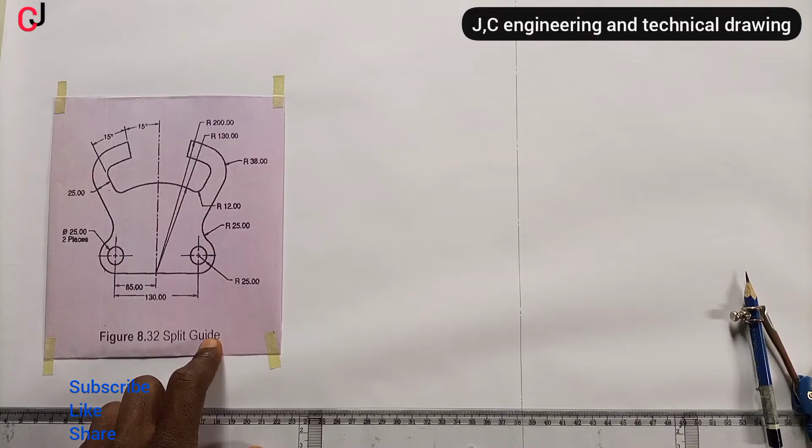Today we'll be drawing a split guide using the principle of tangency.

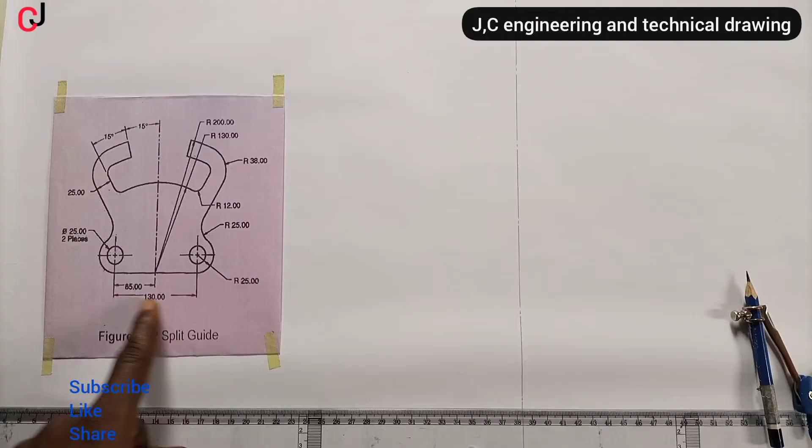So we've succeeded in drawing a vertical center line, which is this. Now from our diagram, we are told to locate 2 points such that the total distance from those points will be 130 millimeter apart.

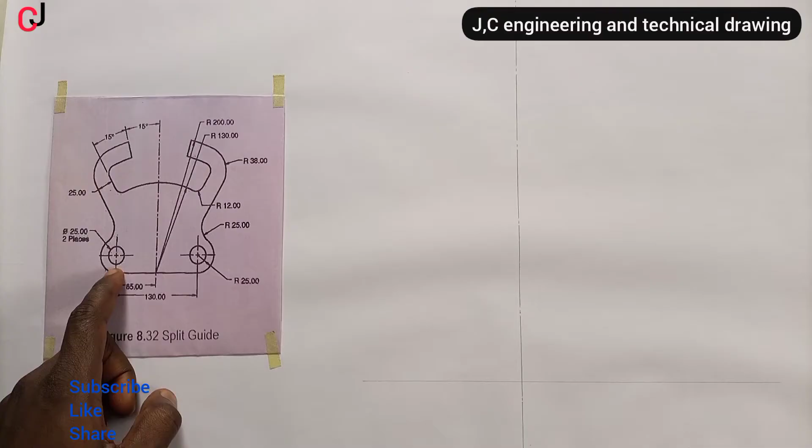All we need to do is draw a straight horizontal line, and from our diagram you can see from this line to this given point is given to us as 65 millimeter. So measure 65 millimeter radius, we indicate it with a point.

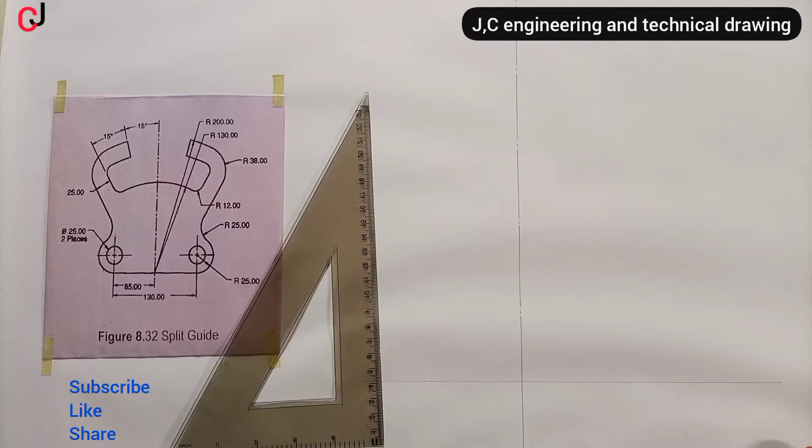Then from our point we draw our vertical line up. You can see also we measure 65 millimeter towards our right also, and then we indicate it the point.

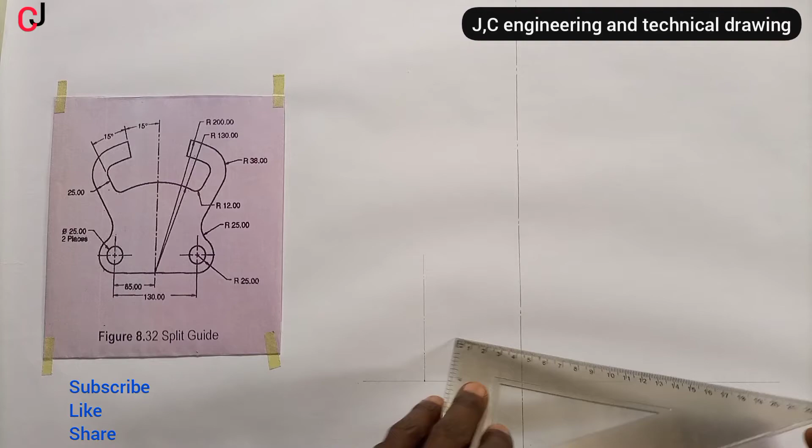And then we'll project the points upward with a center line, which we succeeded in doing.

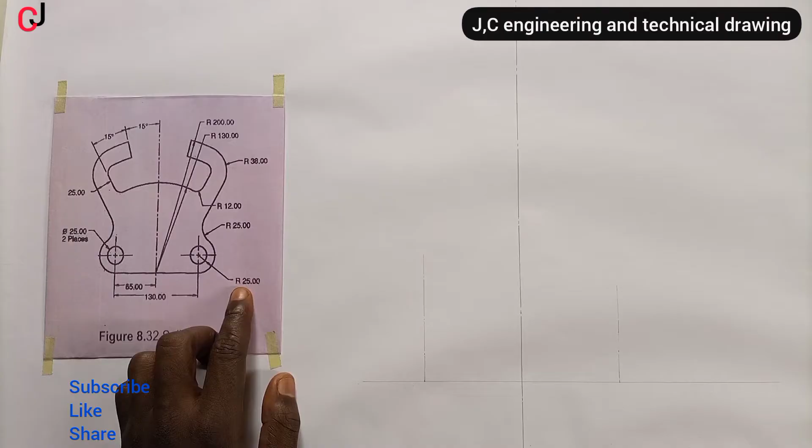From our diagram you can see a radius here of 25 millimeter radius. So what we need to do, pick 25 millimeter from our rule using our compass. Place it at the beginning of this tip, then we'll scribe an arc.

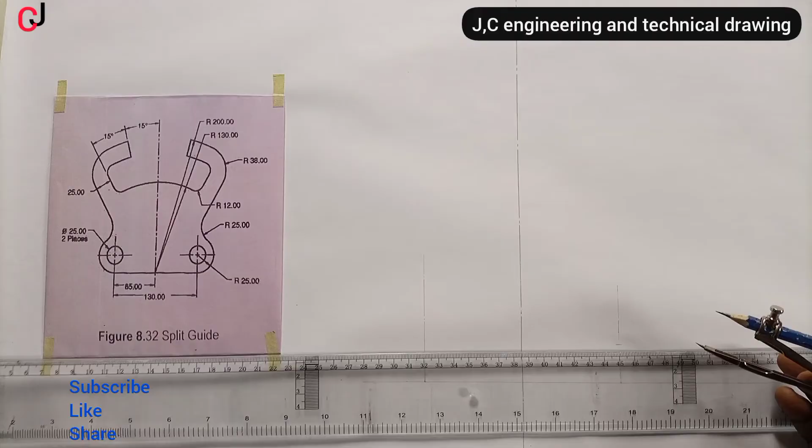Then from our point, our arc which we've just constructed, we'll project the arc with a center line. Also we'll do same towards our left this way, and then we'll call this point here point A, and we'll call this point A1.

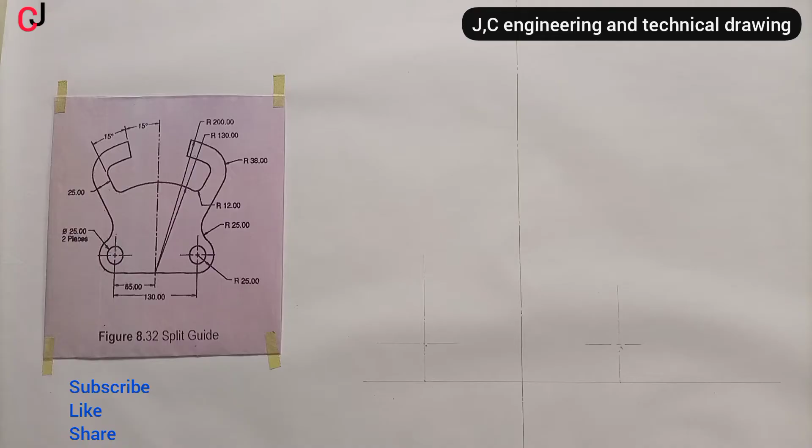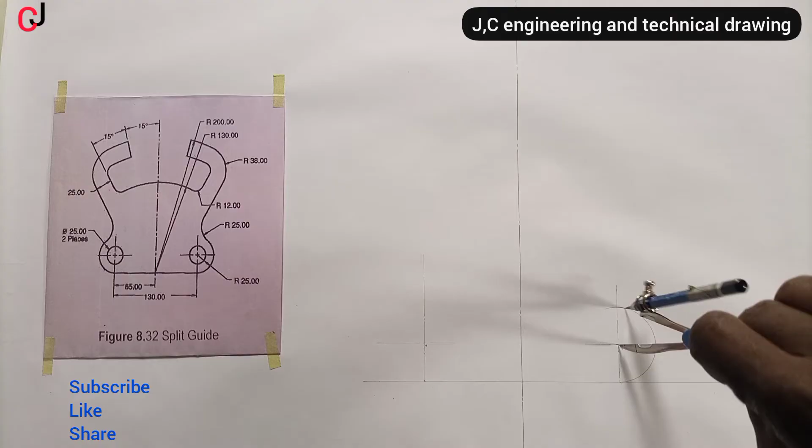Now using point A with radius 25 millimeter, using this point A1 with radius 25 millimeter, we'll draw our semicircle. You can see a curve, it's a semicircle, so we'll draw a semicircle, and then we'll do same also towards our left.

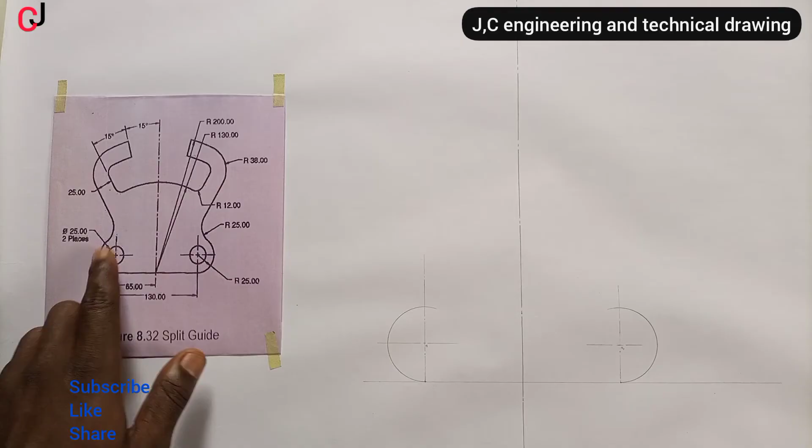From point A we also draw a semicircle this way. So we're going to locate two circles at point A and point A1, given that their diameter is 25.

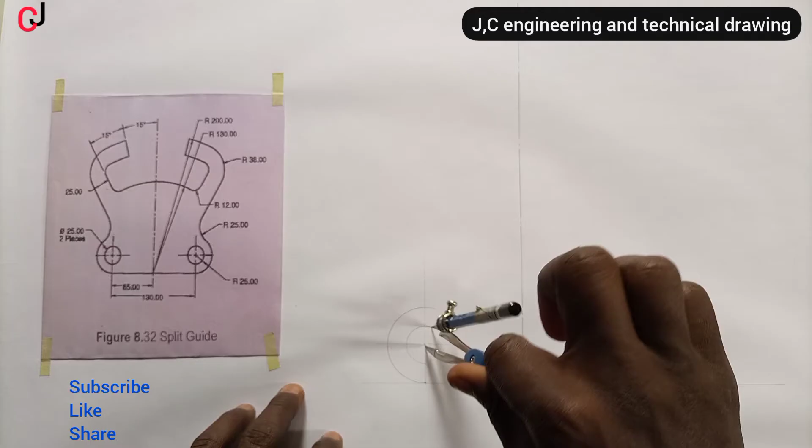So we divide 25 by 2, which will give us 12.5. So we'll use 12.5 radius, place it at point A, and then we'll draw a complete circle. Also place 12.5 as point A1, and then we'll draw a complete circle.

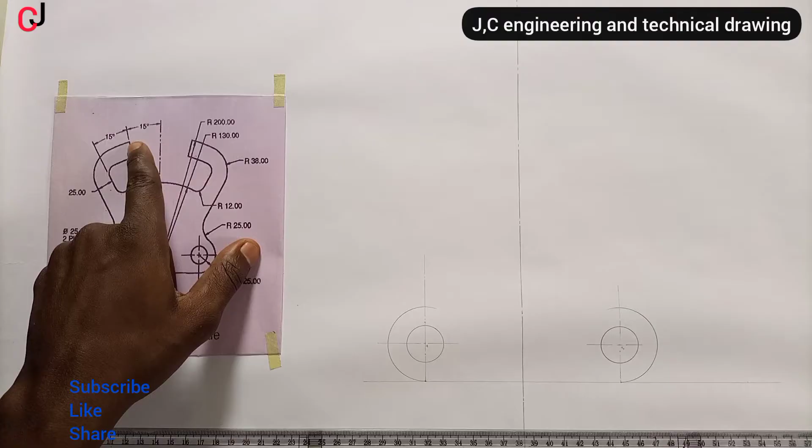From our diagram you can see our 15 degree plus another 15 degree, which will give us 30 degree. So we'll place a 60-degree set square towards this point. If you are placing 60-degree set square at an angle 90 this way, so the remaining portion here will become 30 and will become 30 degree.

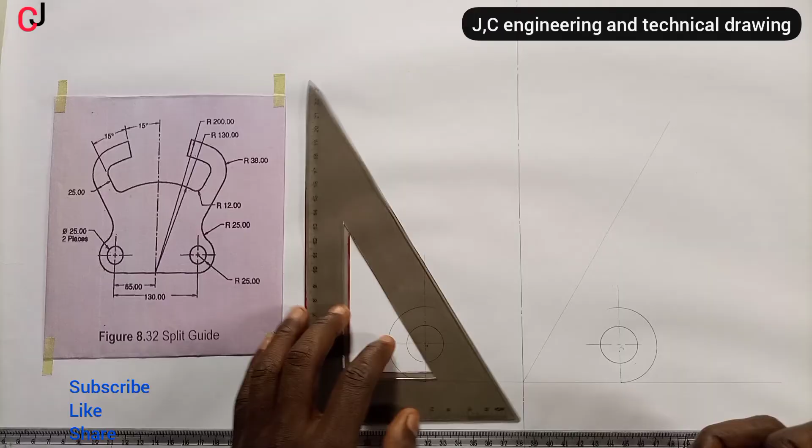So we'll rule using our construction line. Also we'll do same towards our left, and then we rule. You can see we've gotten 30 degree to our left, 30 degree to our right.

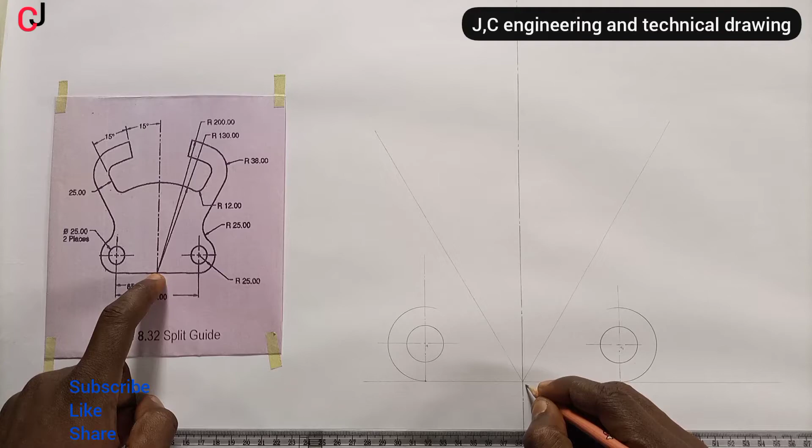From our diagram, they say we should open to radius, let's call this point B. Now this is point B. From point B to this arc, they say we should open to a radius of 130 millimeter. So take 130 millimeter using our compass.

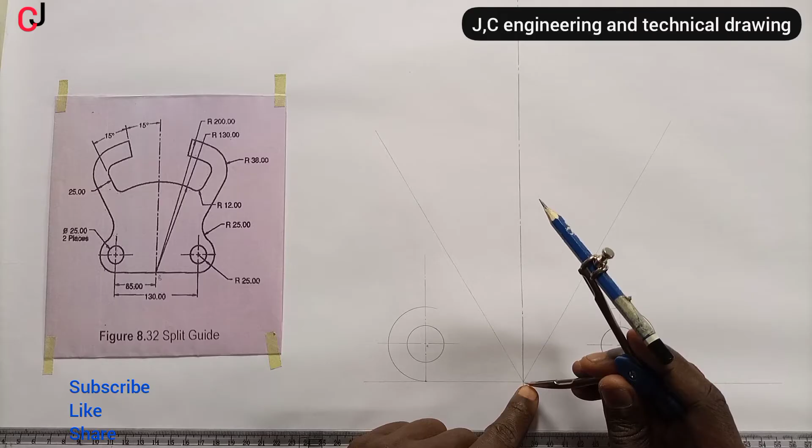So we succeeded in picking a 130 millimeter radius. Compass pin at point B. We draw an arc such that it touches our angle 30 degree at our left and our right, this way.

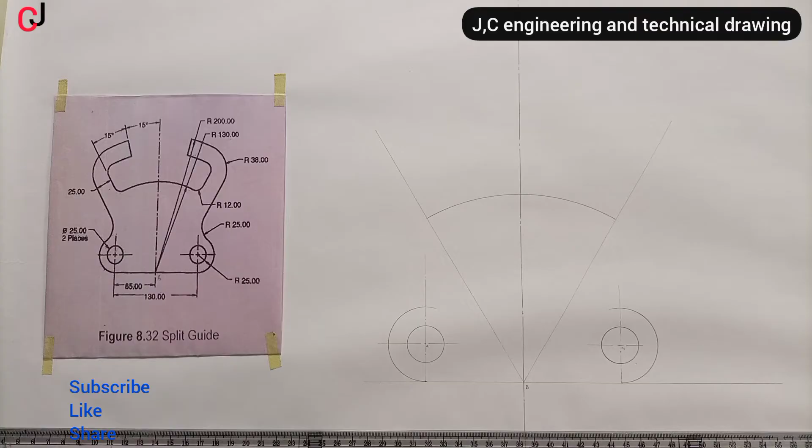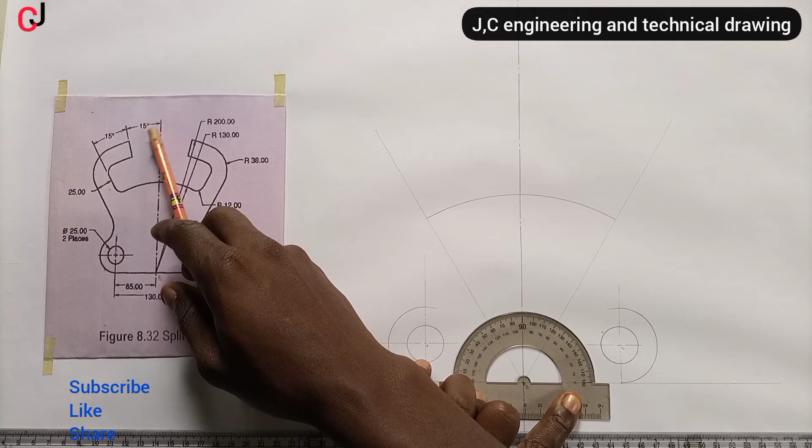So the next thing we'll do, we'll pick our protractor and then we'll align it such that this line falls at angle 90 and the remaining lines falls at 0, 0. That shows balanced. Then we'll pick 30 degree towards our left and then 30 degree to our right.

We'll take 15 degrees, 15 degree to our left, 15 degree to our right. 15 to my right and then 15 degrees to my left.

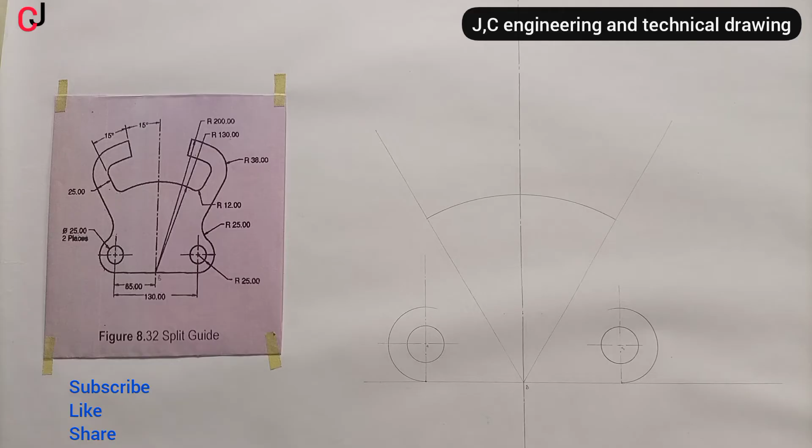Now we'll use a rule. Take our rule from point B to our point which will locate at our left. We'll draw a straight construction line. Make it very light and then project.

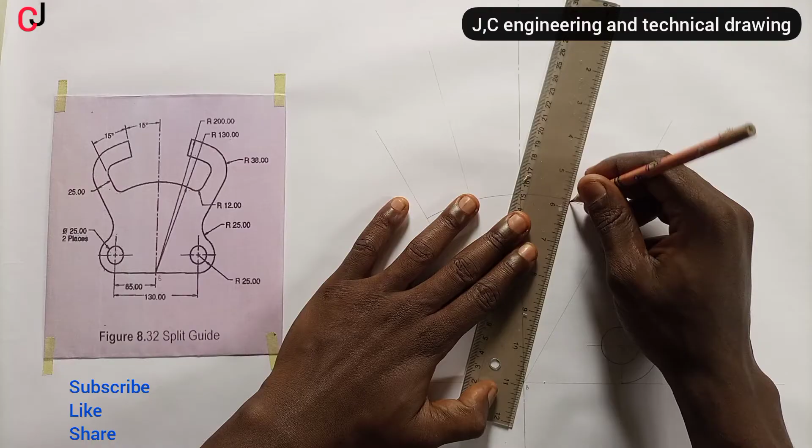Also do same as point B towards our point which will located at our right. Very light construction line, then we've gotten that.

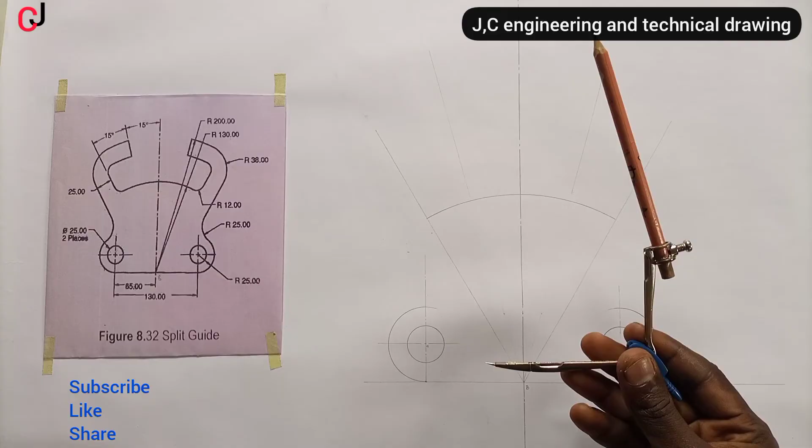And then from our diagram, we are told that from point B to get this arc here, and this is 200 millimeter radius. So open our compass to 200 millimeters radius, which I've done. We'll place it at point B and then we'll draw an arc.

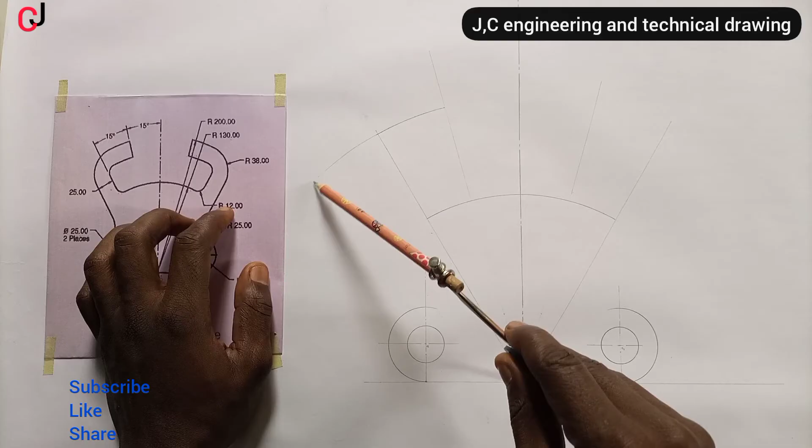We'll draw an arc such that once it touches this 15 degree, we'll stop. Do the same towards our right. You can see, and then we'll erase the portion outside to make our work look very neat. Now we're done with this portion.

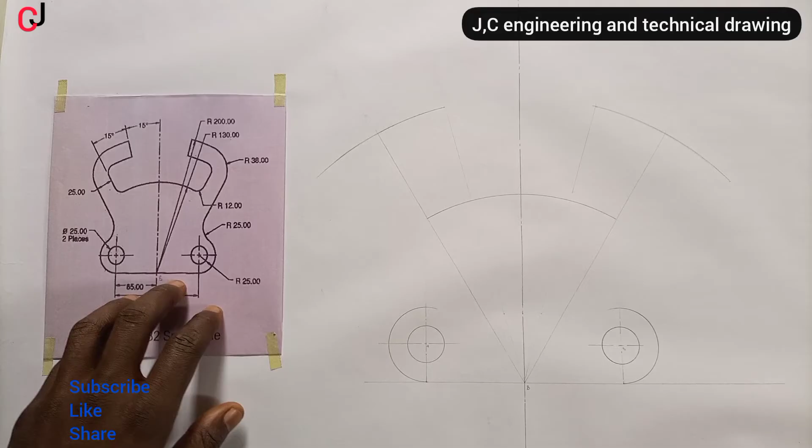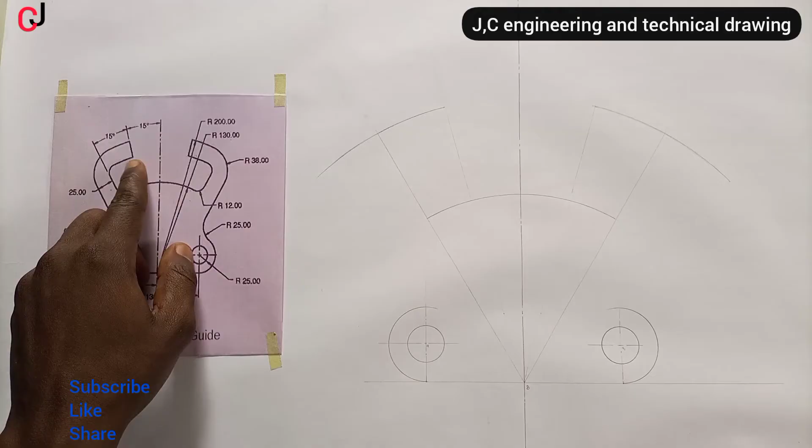Now from our diagram, you observe that they say the thickness of this is 25 millimeter. So this thickness from this point to this point is 25 millimeters. So all you need to do is take 25 millimeter away from the 200 millimeter radius, which will give you 175, which will give you this arc. So you open to radius 175 millimeter to get this arc, which I've opened with my compass.

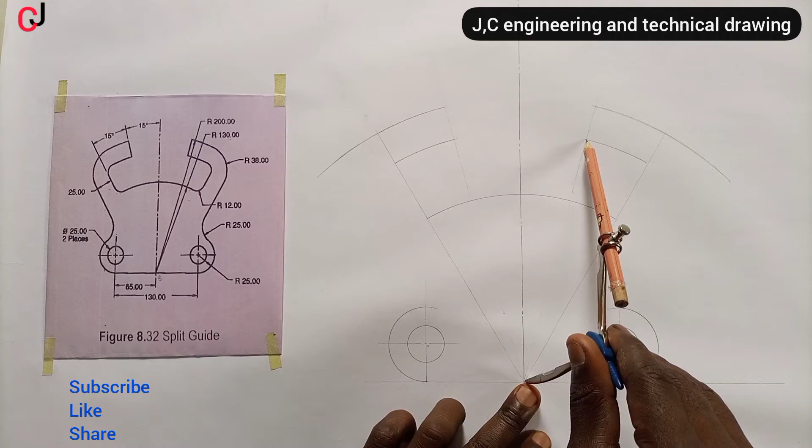Place it at point B, and then I'll draw an arc also to my right. And so you can see our image is coming out. So erase this portion and then we'll erase this also. Then we'll outline this and this. So we've done outlining both parts. Now we'll focus on these aspects.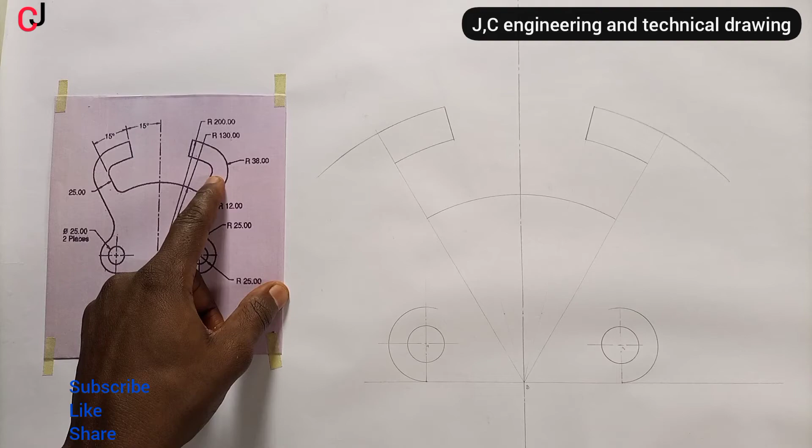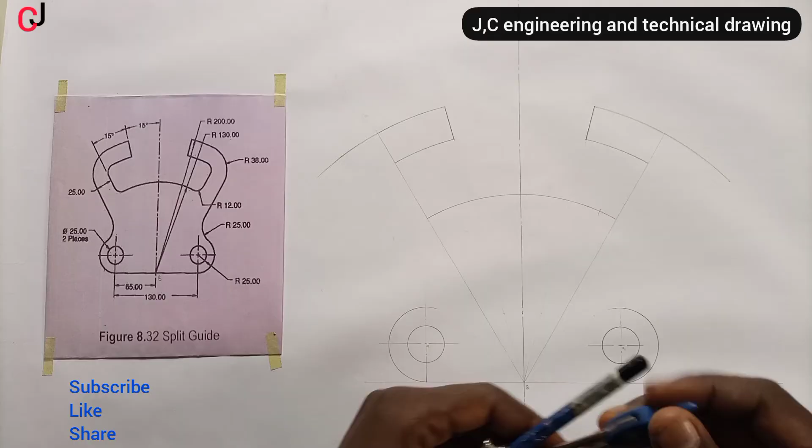Now there's a curve here. There's also a curve. There's a curve. There's a curve. So they say the curve is 12 millimeter radius. So you come to this point here, you pick the tip at which this arc and this line meet. Then you scribe an arc with 12 millimeter radius. You scribe another arc. Now we call this point at which you scribe here point C and here point C1.

Now using point C here, we scribe an arc. Using point C1, we bisect the arc. Now using the point of their intersection, you can see, touching point C1 and point C, we'll draw our arc. Now we'll erase this portion.

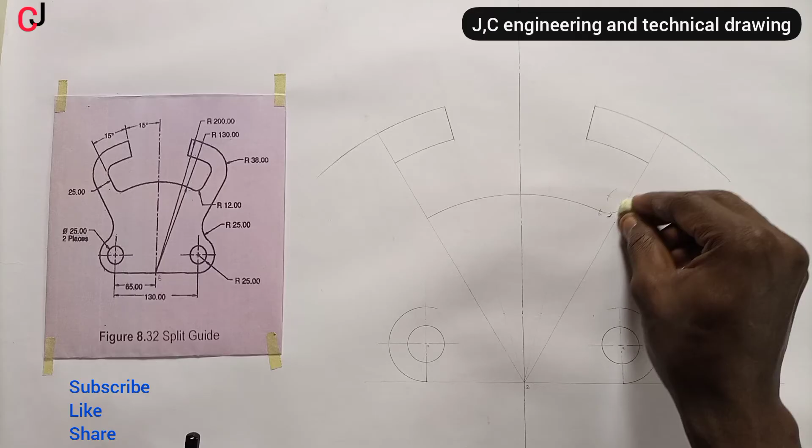And remember it's a radius, so a full circle is supposed to enter that portion. So I'm repeating it. Now I'll put the construction line. You see a circle entering. You see it's perfectly done. So we'll do the same thing to this portion here.

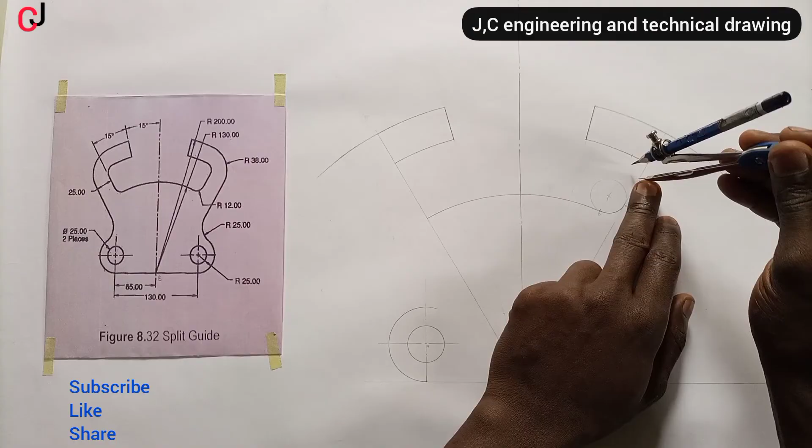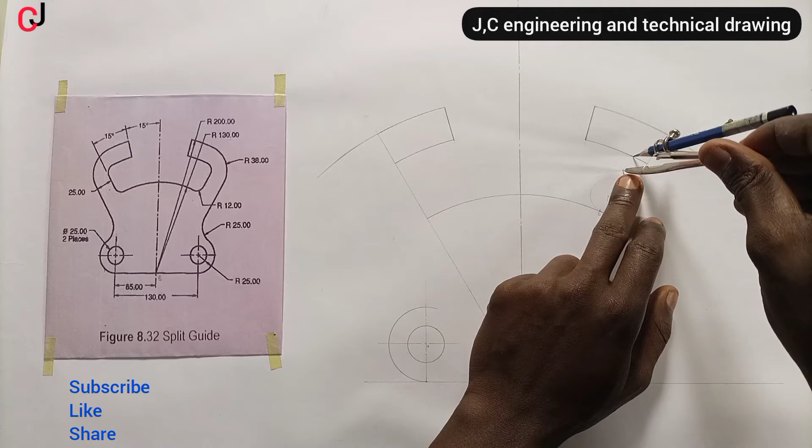Then you bisect the arc. Use the point of the intersection. Make sure you get to the point of the intersection. Then we'll draw our arc. If you like, you can make a construction line with your complete circle. Now you can see we're done with that.

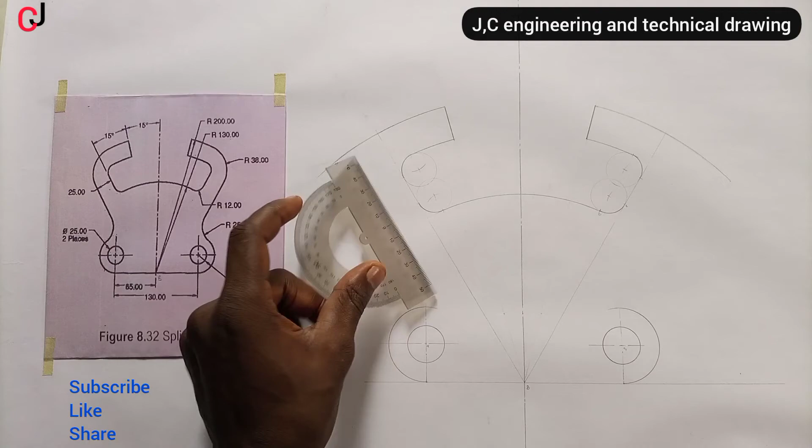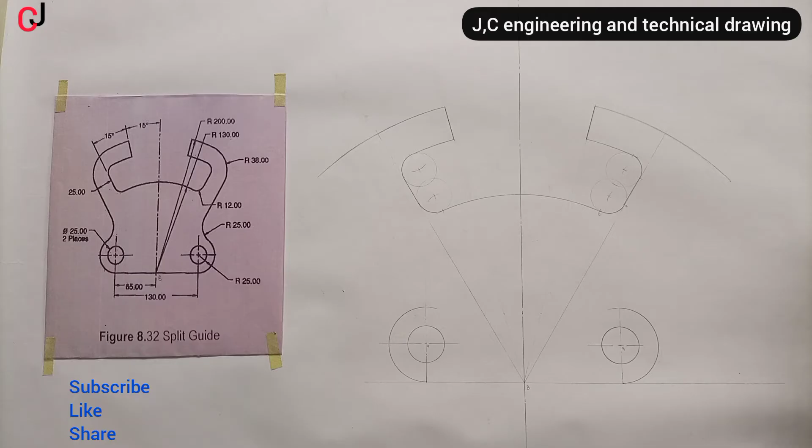So repeat the same process towards our left hand side. So we are done repeating similar stuff here at this side. So outline this portion over here. You can see the straight line of our 30 degree. We'll join with a straight line. Also do the same here. Make it neat, like mine. All right, then we'll move to the next step, which is getting this portion over here.

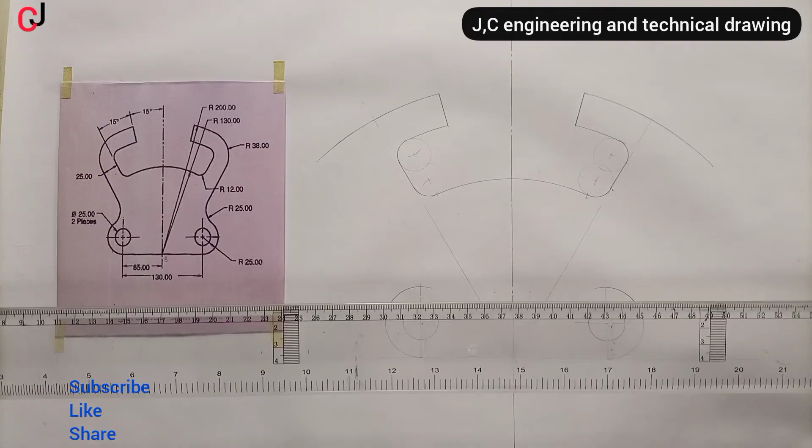There's a line here which they say is 25 millimeter distance from this line, 30 degree. So all we need to do, you can see my T-square, I place it down, I shift it downward, I bring my set square, 30 and 60 degree set square. I'll place it this way at point B. You can see my 30 degrees facing my left and my right. So I'll use my pen, and then I'll draw from point B.

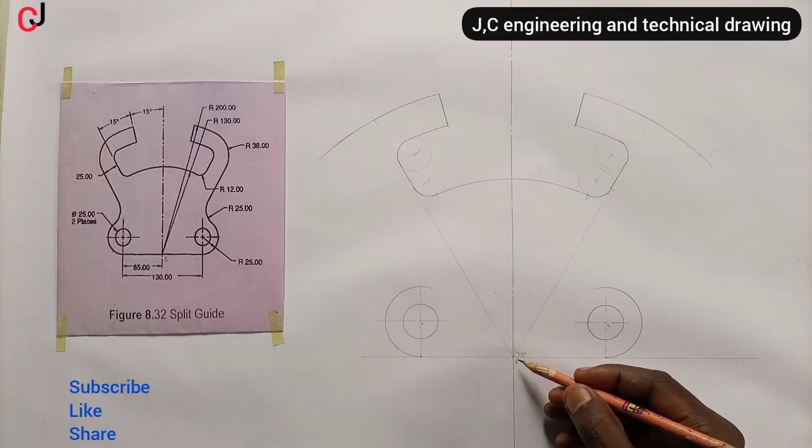This is point B, which is also this. From point B, I'll draw a straight line downward. Now what I just did is that I've succeeded in creating an angle of 90 degree at point B. So now from my 90 degree line, from the line I just created, I'll measure 25 millimeter, and then I'll indicate this 25 millimeter with a point.

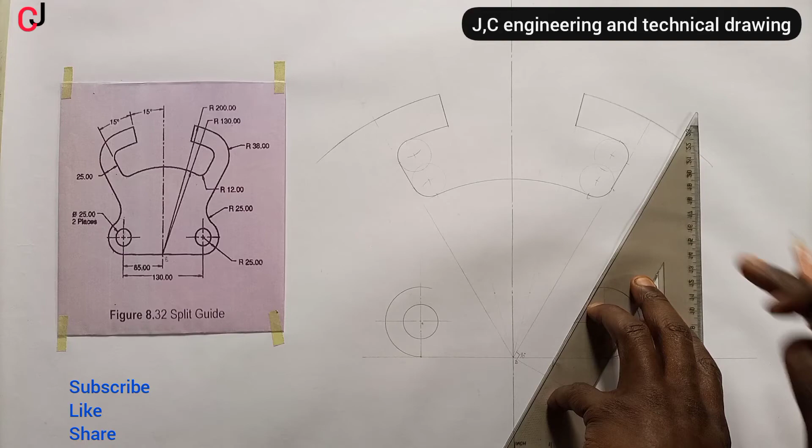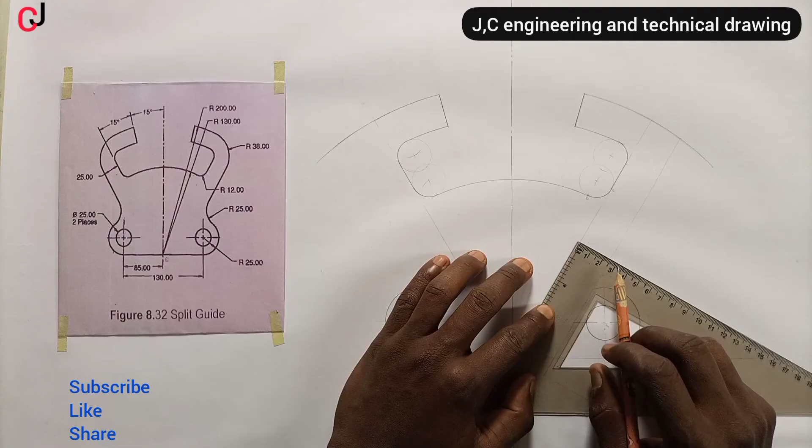Now from the point which I indicated, I'll place my 60 degree set square towards this direction, which you can see on the screen, and then I'll draw a straight line from the point till it hits my radius of 200, the arc which we got. And then if you measure it closely, you find that it's giving you 25 millimeter distance apart. You can see it clearly from the screen, 25 millimeter apart. So we do the same thing towards our left hand side.

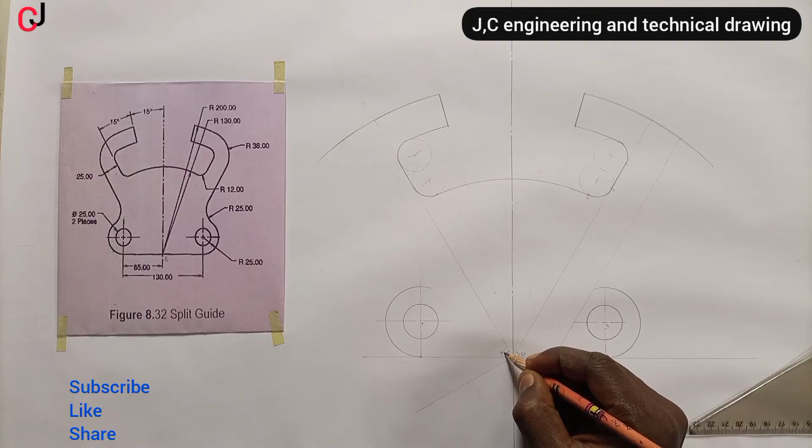From point B, I'll draw a straight line. Now creating angle 90 degree at point B, I'll measure 25 millimeter from point B, and then I'll indicate to the point.

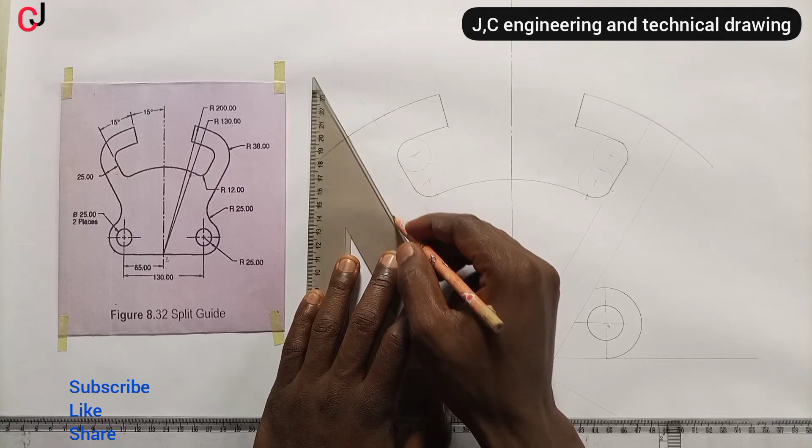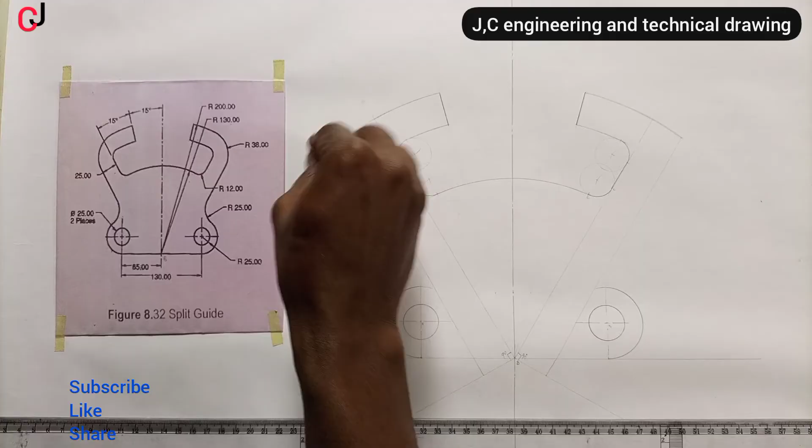I'll place my 60 degree set square this way, which you can see on the screen. Doing it this way gives me a chance of drawing a parallel line having 25 millimeter equidistance. So the next thing I'll do, I'll erase this portion, and then I'll erase this portion also.

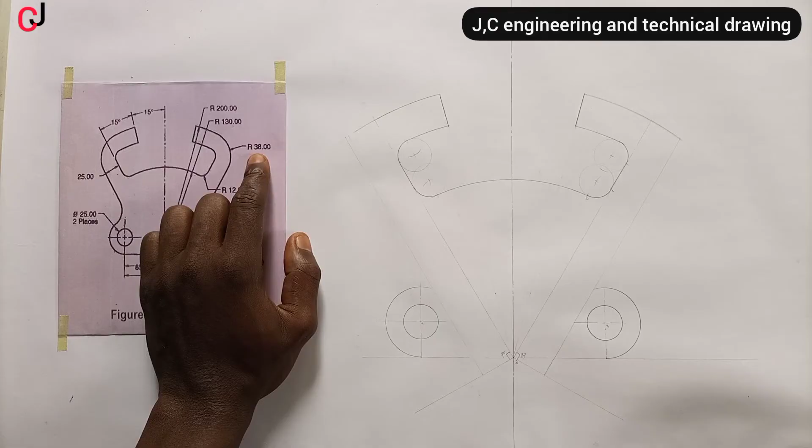Now the next step, you can see from our diagram, we have a curve at this portion here, and then a curve at this portion also. So what we do, we'll pick 38 millimeter radius with a compass, which I've done. We'll bring it at the point where this line and this arc meet, and then we'll scribe an arc, scribe also an arc. We'll call this arc C1 and then C2.

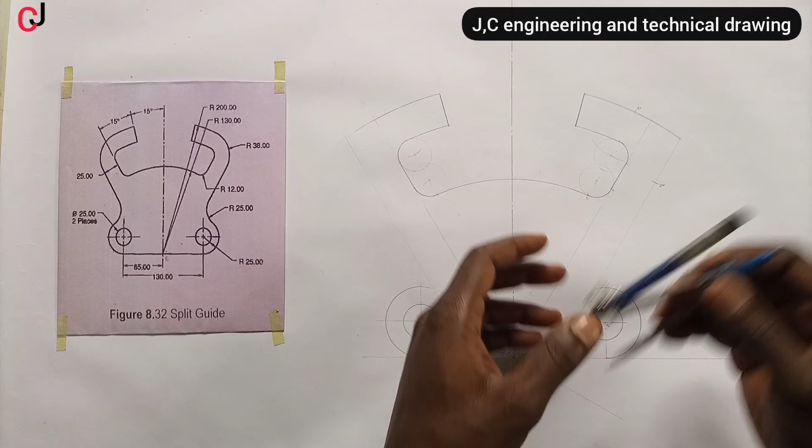So using point C1 on this arc, we'll scribe an arc. You can see my arc. Using point C2, we bisect the arc. Now using the point of the intersection, we'll draw a radius. We'll draw an arc.

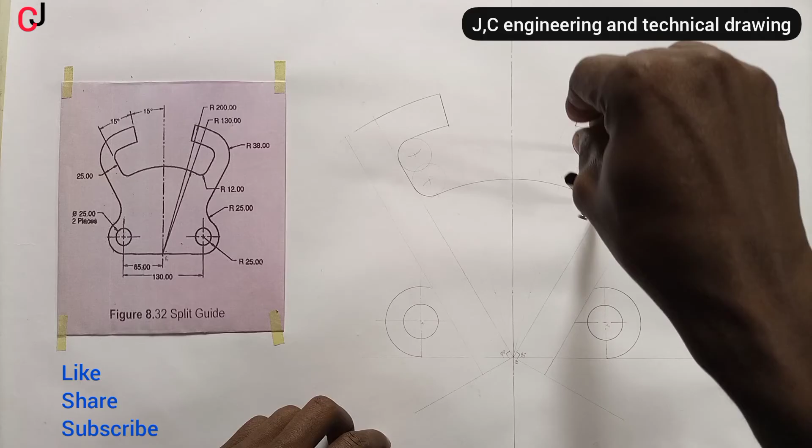Now if you want to see this, you can also do this. I don't see it necessary, but some institutions will ask you to draw with all details showing, so you can see it's a construction line, there's a circle there, so you are free to erase this portion here, which is not needed anymore. So the next thing we're going to do is repeat a similar process here. There's a radius here joining this circle and this line together.

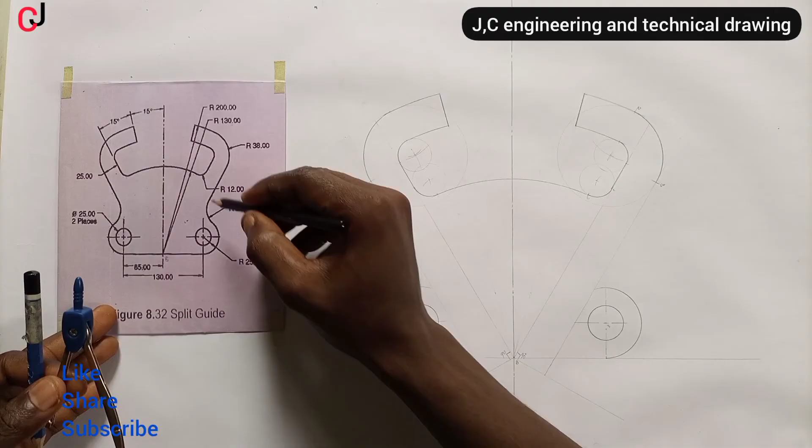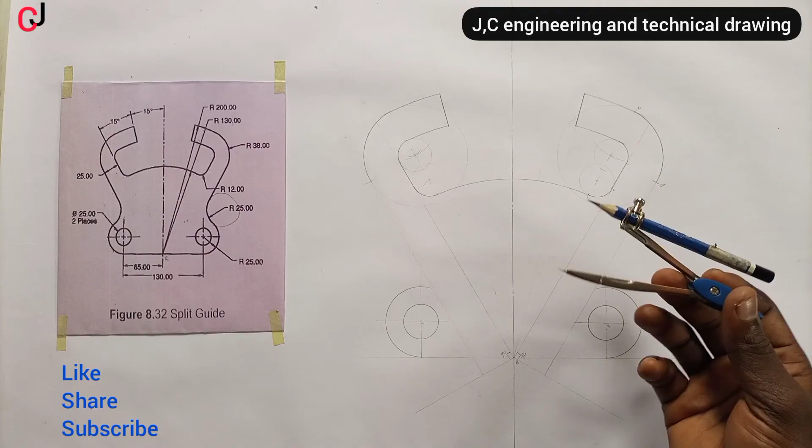Now one of the principles of tangency states that when two circles touch each other externally, we add their radii together. They are touching each other externally, so add the radius together. So add radius 25 millimeter with another radius 25 millimeter, which will give us radius 50 millimeter. We take our 50 millimeter with our compass, which I've done. We'll place it at point A1 here, and then we'll scribe an arc. Also place it at point A here. We'll also scribe an arc because it's similar.

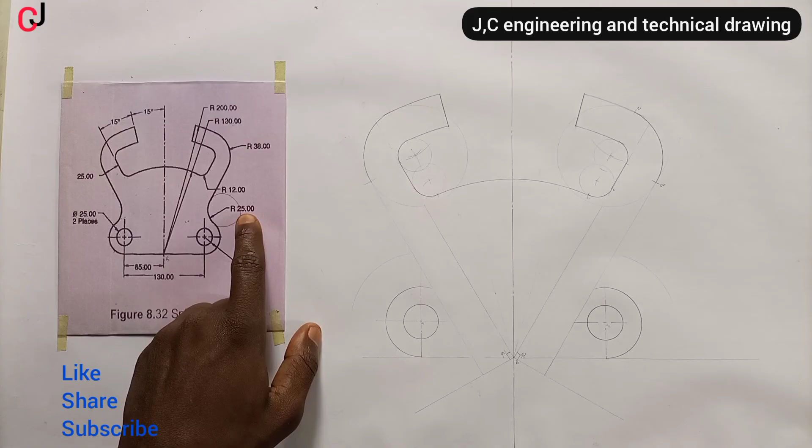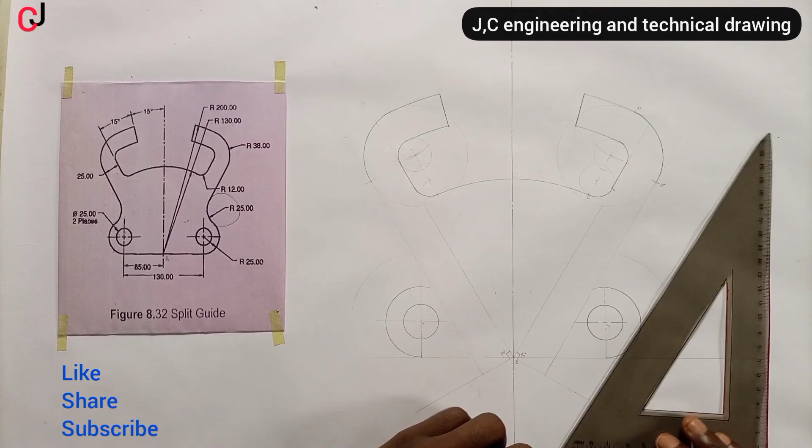And then you find out that this radius is radius 25 millimeter. So you take your rule from your angle which you've gotten, you measure 25 millimeter. Make sure you do it very perfectly, 25 millimeter. You indicate to the points, and then using your set square, you draw a construction line, very light, such that it will bisect this arc.

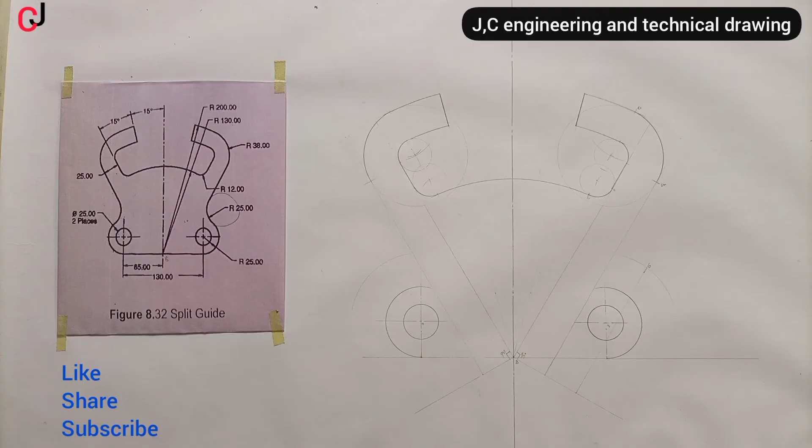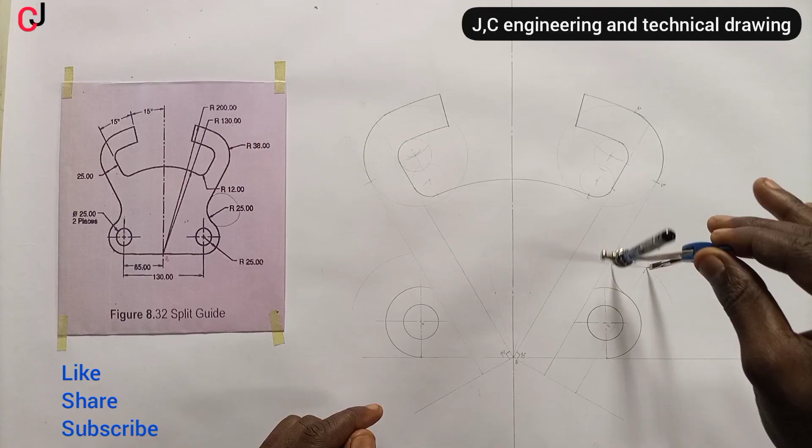Now using the point of its intersection, point O, you open your compass, which I've done, to radius 25 millimeter, place it at point O, and then we'll draw our arc touching the circle and the line with an outline. Make sure this is an outline. And then your detail work should be in a construction line, so that you can see that the circle here is not entering this and it's not entering the line.

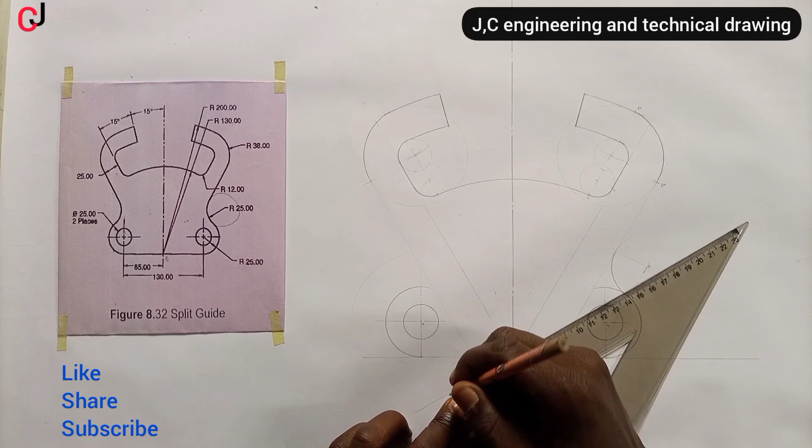Also pick 25 millimeter from our left side. We indicate it with a point, and then using a set square, we'll draw a straight line, construction line, to bisect this. Now the point of the intersection here, we'll call this point O2. Using point O2, open a compass to radius 25 millimeter.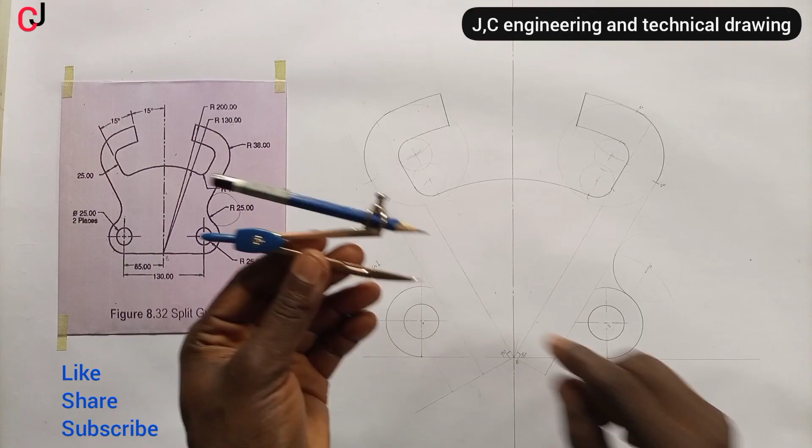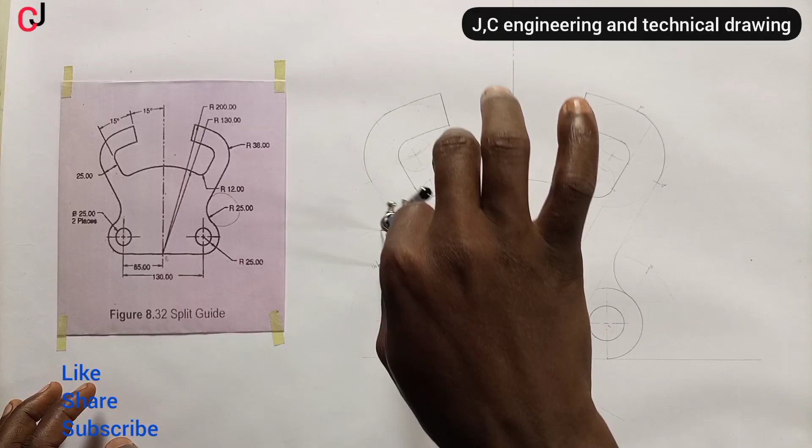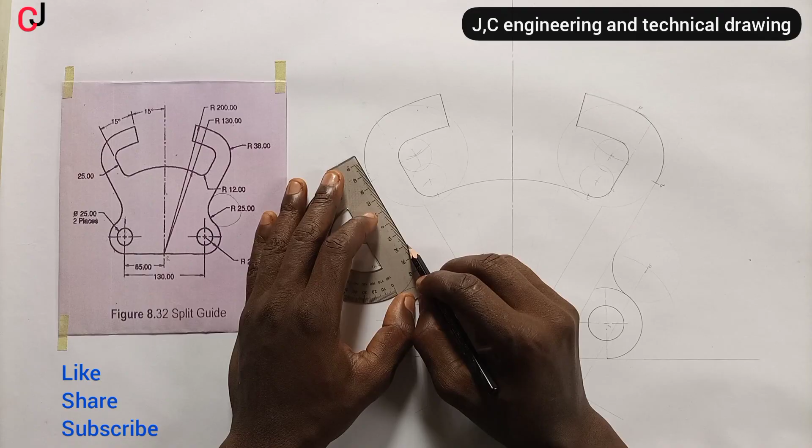Now using the point of the intersection, point O2, you open your compass to radius 25, which I've done. Place it at point O2, and then you draw your arc with an outline. You can see that we've succeeded in drawing our arc, and then we'll outline. We'll join these lines together to make it right. We'll outline and don't give it a double line. Also do the same thing to our right. Then finally we'll do the same at the base.

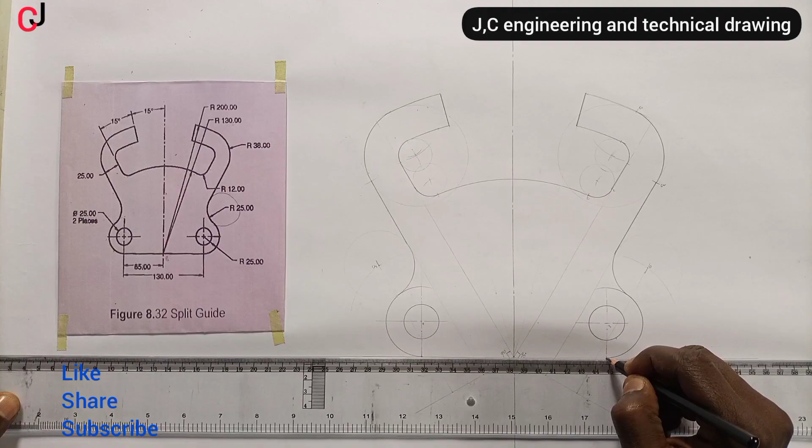So we've done constructing our split guide using the principle of tangency.